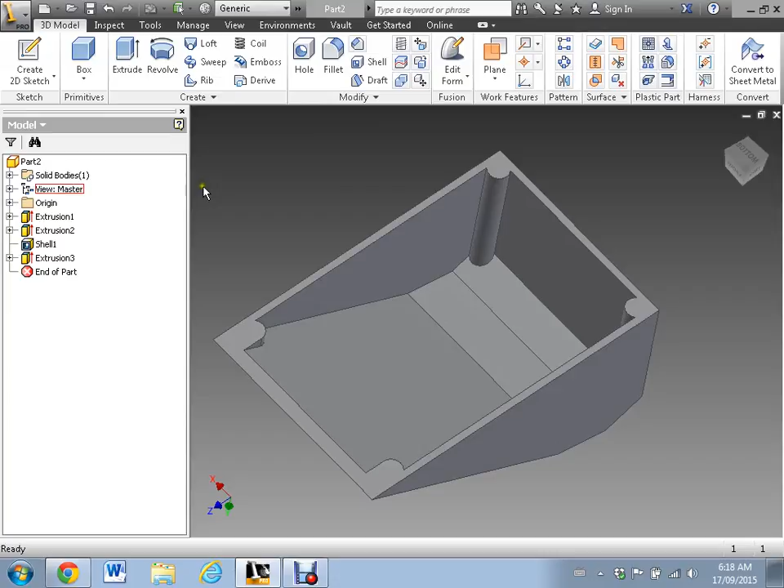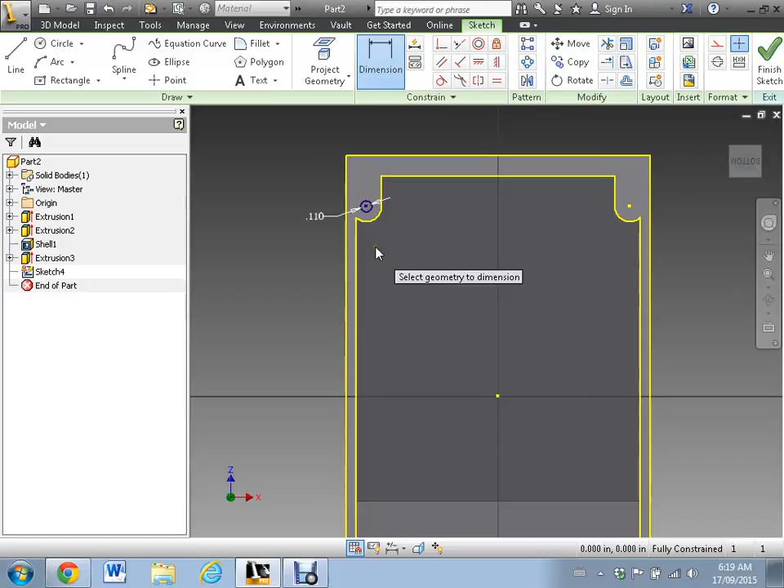I'm going to continue here. I'll click on the surface and create a 2D sketch to make some holes for screws. I'll click on one spot and dimension it the first time to get this right. This is going to be 0.11, for the size of screw you guys will be using. Once that's done, it's pretty straightforward.

Let's go and mirror it. I'm going to take a line, and right mouse click and hit cancel. Now I'll go to pattern, select my geometry, select my mirror line right there. Whoops, I'm going to select the other geometry. Hang on, let me think about this. Oh, can we do that? No, we can't, so I'm going to cancel out of this.

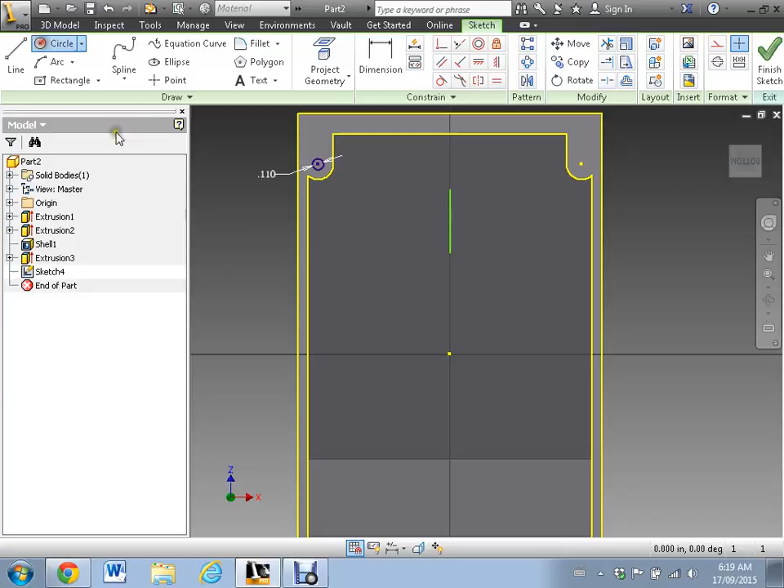Before I do that, I'm going to put the other circle down here. Just thinking about how I'm doing this. You can see it automatically lines up if I do it right, so I don't have to do any dimensioning. Now I'll do my pattern, selecting that as one geometry and this down here as the other, plus my mirror line. Then I hit apply, and they're both done.

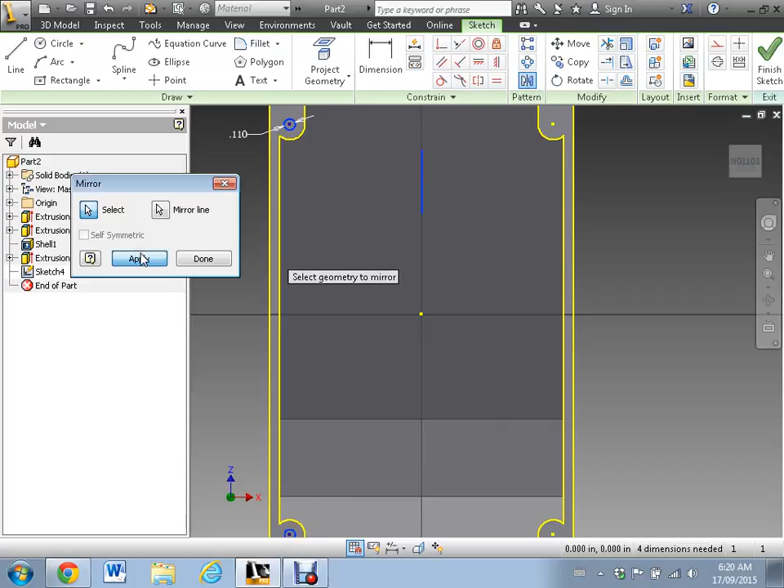That's the easier step. So there are my screw holes. Now I'm going to click finish sketch.

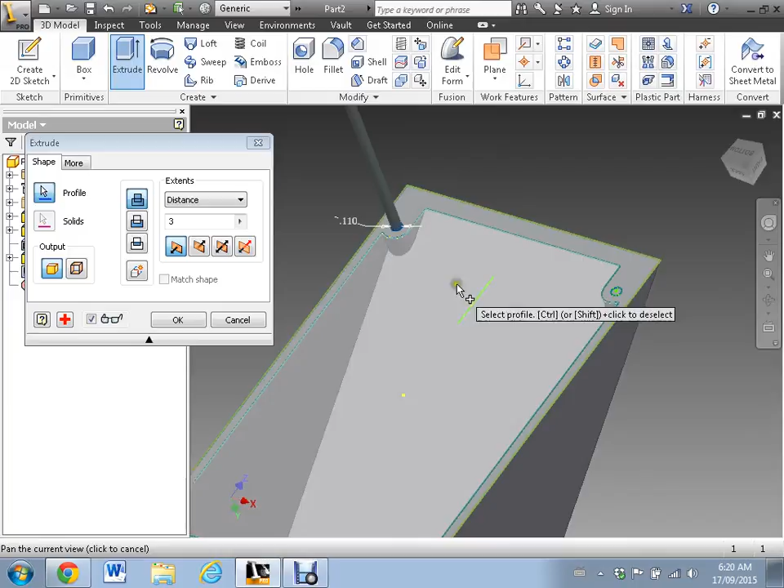Now I'll extrude as usual, zooming in here so I get the right ones. I might have to zoom in and out a bit to get these. Come on, there we go. Zoom in to get that one, zoom out a bit, zoom in, there we go, and the last one.

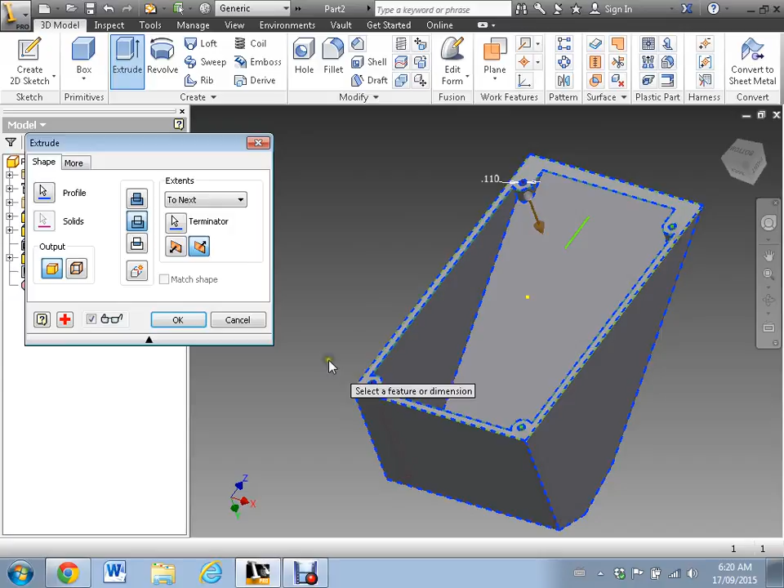This time I don't want these to go all the way through because there will be a hole on top. If I go to next, you can see it automatically cuts, but the bottom ones in the front come all the way through, so I'm not going to do next.

I'm going to go to distance instead. The screws are quite short, so I'll put it at 0.3 of an inch. When I do that and hit enter, you can see... oh no, they're still going through, so I'll have to adjust that.

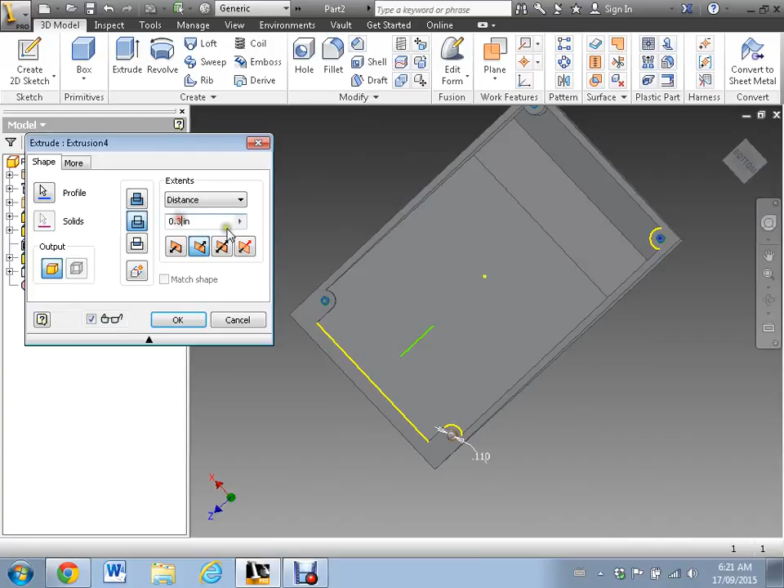Let's go back into this extrusion. Maybe they're 0.275. Let's see what happens there. Now when I flip it around, okay, they're barely hidden.

On my design, because of the way I did it, I might actually have to change it. Let's go back and put this at 0.375 because I like that. Hit OK. Well, I guess I've got to change my body.

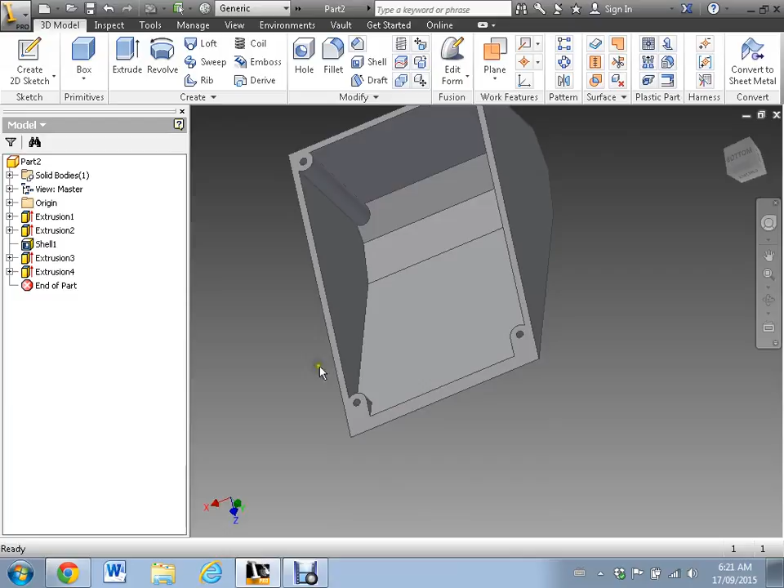I'm going to go back up to this extrude here, back to the sketch, and double click it. I'm just going to put some dimensions in here now.

Let's dimension that one. Actually, no, hit cancel, let's just delete this dimension. Hit escape, click on that one, hit delete.

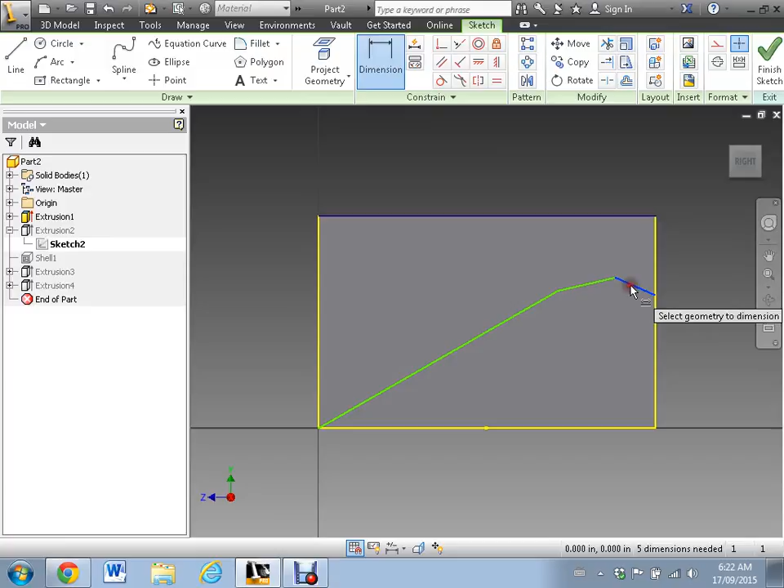So for the dimension, if I click once and click again, then I can click there. X out, let's try that one more time. I should be able to get that angle dimension. I click once, there, come back, and click again. There we go, that's the angle I want. I'll just hit OK for now.

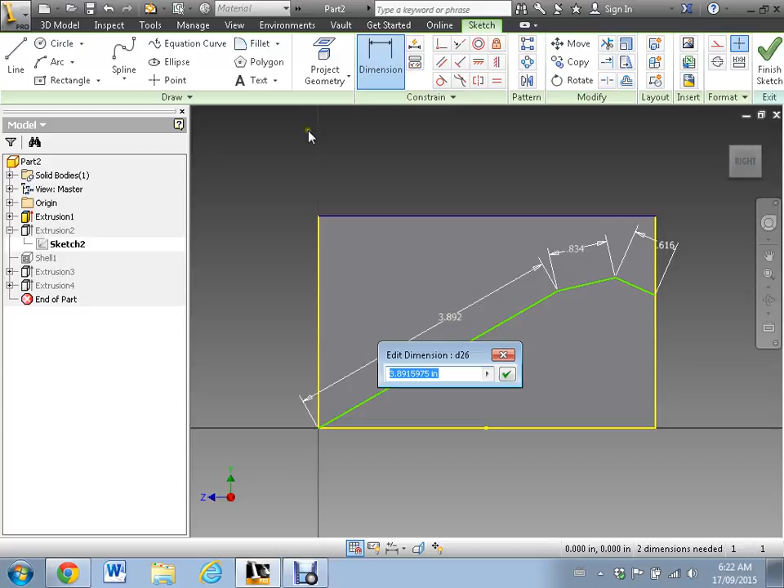And this one I click once, I go off of it, come back, click again. There's that dimension, okay. This dimension, no, click again, there's that one. So what I'm going to do, and the other dimension I'm going to do, I think, so that's okay, is I'm going to go from right here to here. There we go, that's the one I want. I'm going to click OK.

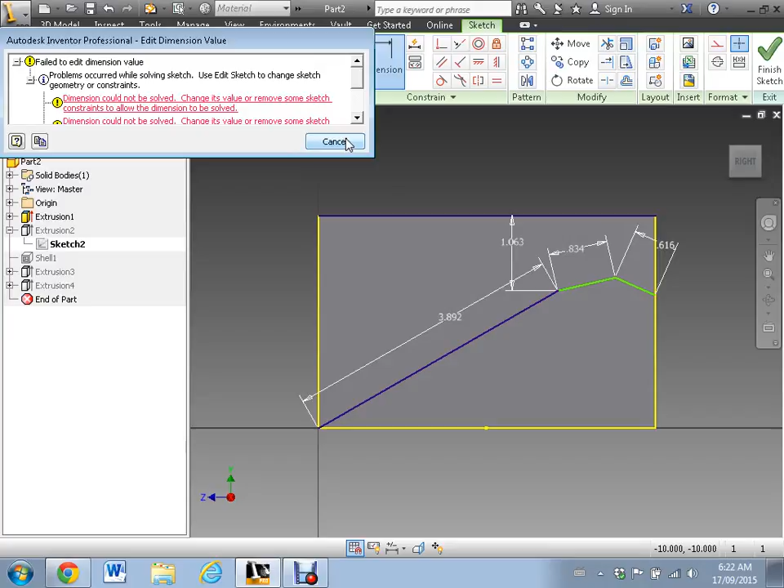Now I might get an error here, so let's find out. I'm going to change this and lift it up a bit, so I'm going to say this is going to be 0.75. Okay, what happens? Yeah, it's going to give you some errors because I put some dimensions in here, right? So I have to delete some dimensions first. Let's just delete this one because that angle, that distance is going to change. And let's delete this one, okay, because that's going to change.

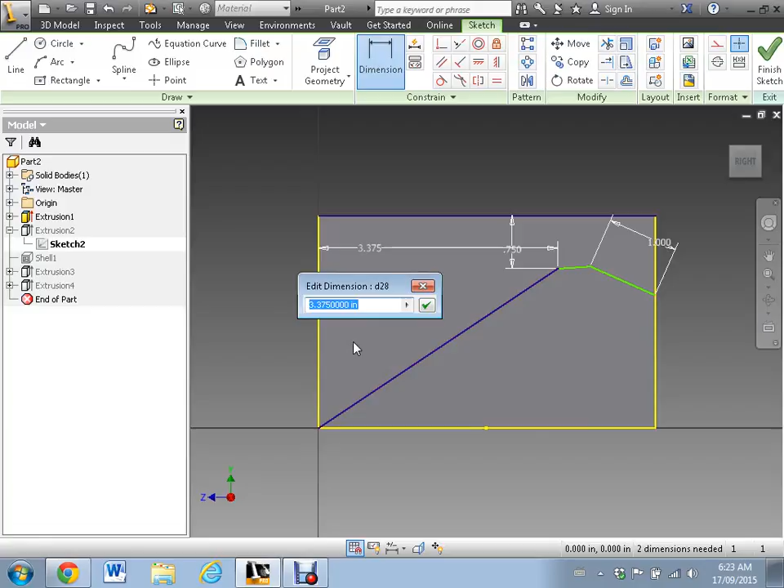Now when I change this to 0.75, there we go, it's more of an angle. And this one here, I'm going to take, and I'm going to say that one's 1. What happens when I do that? It just does that. And I think the last one I'm going to change, if I go from here to here. I'm going to change that to 3.375. There we go, a little steeper now.

Okay, hit finish. You'll see that this will all change. You can see the holes are still there. Now what I'll do one more time. Oops, let's go back up to this sketch here. And let's just change this number to 2.75.

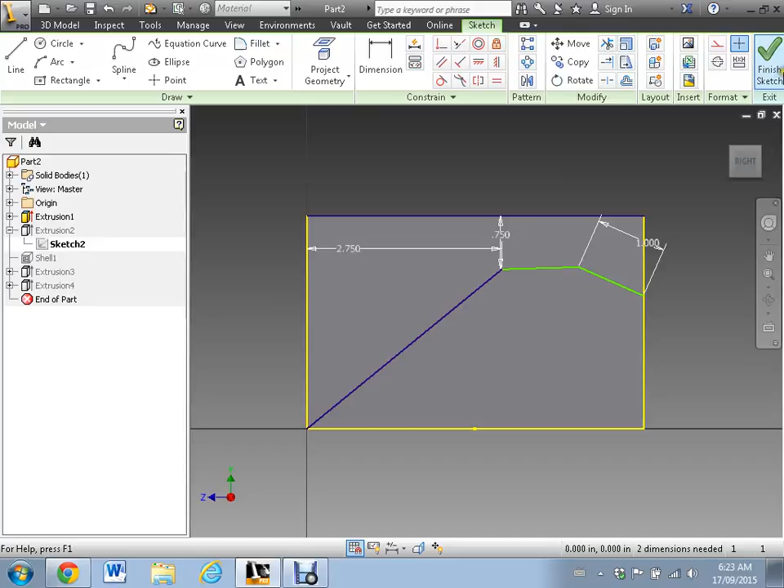Okay, you can change this, and I'll explain this, is you can actually go and add stuff here. I mean, you don't have to do the shape that I'm doing. The whole point of these tutorials is actually to show you that you can modify stuff, right? So yours doesn't have to look like this at all. So if you wanted to, you can simply just say, oh, you want to know something?

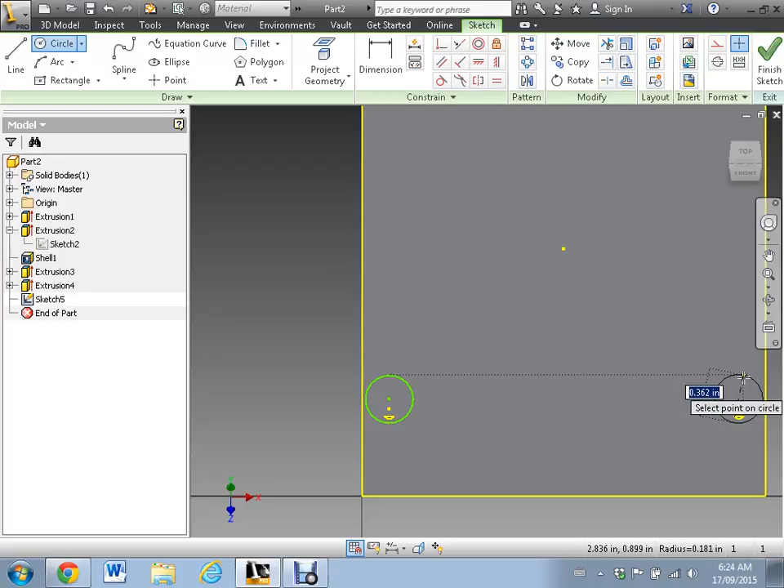I'm just going to take this and I'm going to create a sketch, and I want to create something around here, right? So I'm just going to put, let's see, not on that hole, but I'm just going to go right here. Let's go create a circle, right? And I can say, well, really, I'm just going to hide those anyways. So if I do that, and then over here, I'm just going to line that up. There's my lining up, and watch, it'll automatically line up as soon as I'm done. There we go. I could say, well, geez, that's what I want there, finish sketch.

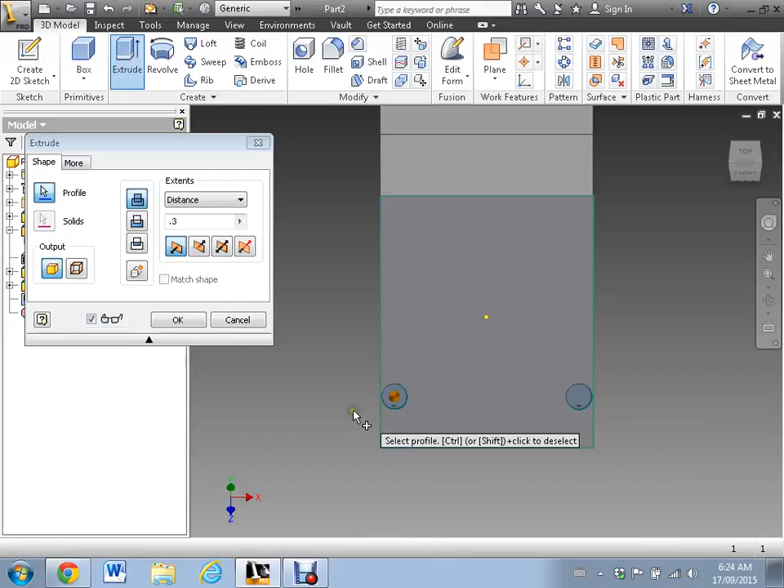And I can then just go and extrude the boxes, right? I can just go extrude this. Let me get out of that in a second. So let's go back to extrude, and I could say I want to extrude this here, and I want to make something on there, right? So I could say I want those little nubs there, and you can screw something into there later. So it's up to you.

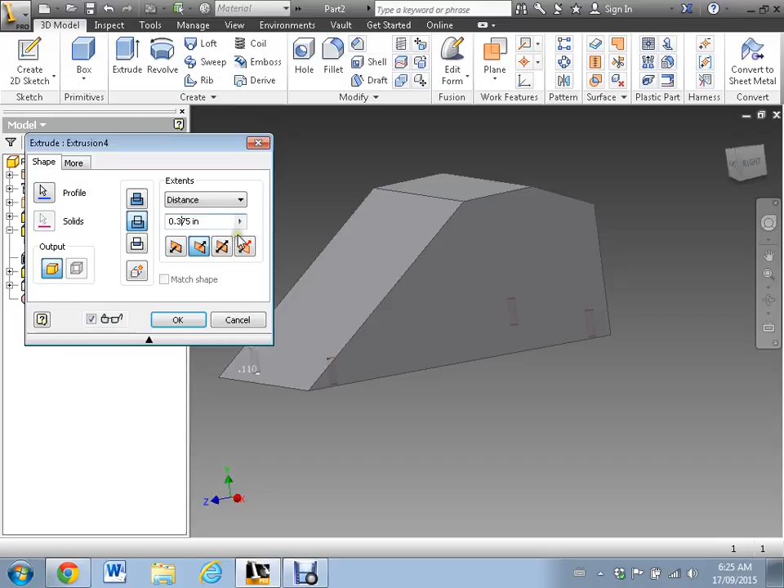But for right now, for this purpose, I'm just going to change, because I still have those holes, I'm going to delete this sketch. Okay, I'm going to go back to these little holes, and I'm just going to put that down to 0.3. And those will be hidden now. There we go, now they're hidden. So that kind of completes almost my body.

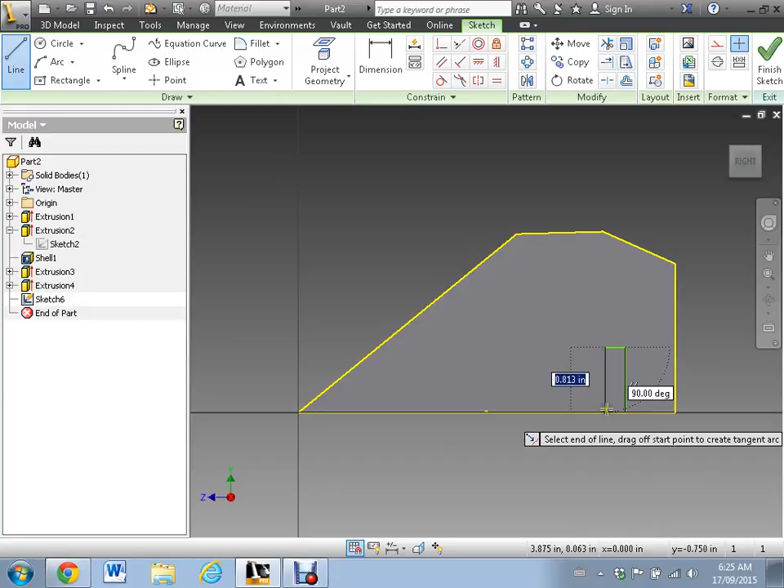The last part that I need to do is for the axle holes to go through. So I'm going to take that surface, and I'm going to go back to Create 2D Sketch, and I'm simply going to create a set of lines. And what's going to happen is when I do this, and this is just my quick view, and again, you know that I'm selecting and closing off a box here, and I'll hit Escape. Shoot, that's not what I wanted to do. Go back to here. I'm going to hit Escape. I hit by accident F1. Okay, so cancel it. There we go.

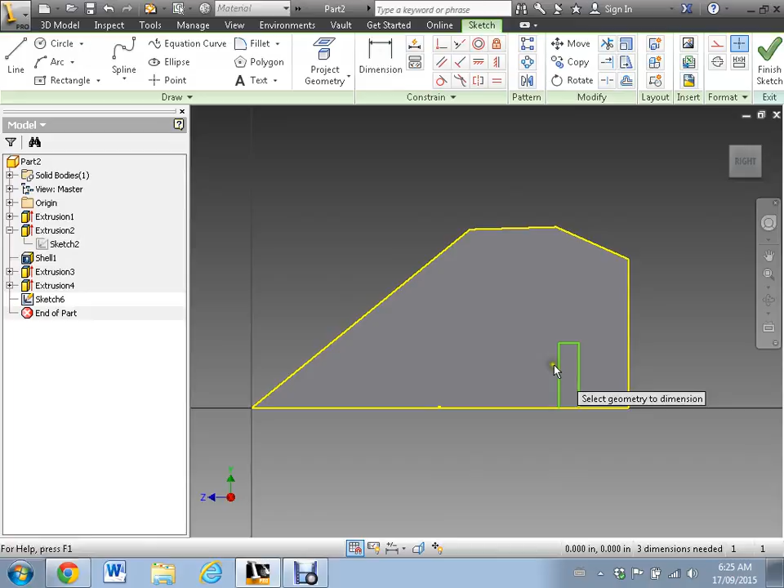Okay, so I'm going to put some dimensions on here, because from the back, this is going to be important from here to here, because I'm going to probably have to adjust this in the next tutorial.

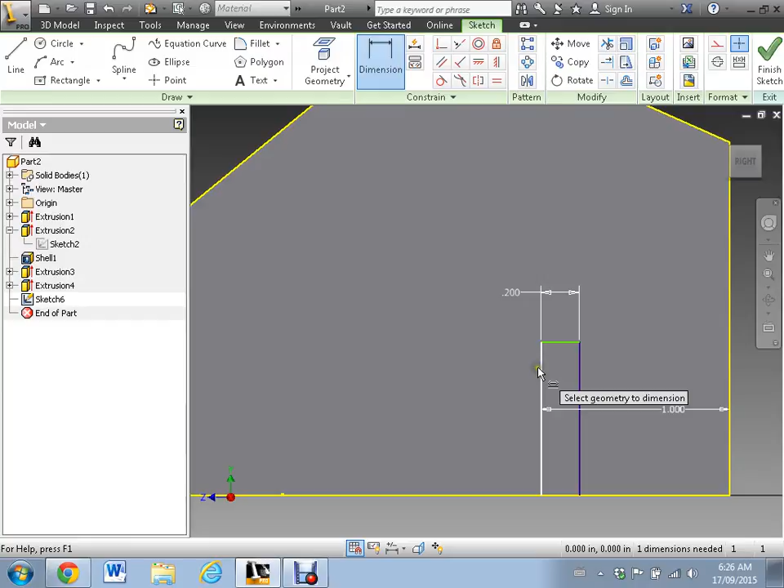Okay, I'm going to change that to 1 for right now. I'm going to take this line and dimension it, maybe set that one to 0.2, and I want the height, so from here to here, maybe that's going to be 1 for now. Now I put the 1 inch from there to there. I think I'm going to escape, or click on this.

I'm going to right mouse click. I don't think it shows up on your video, and I go, no, I can't do that there. So I'm going to take that dimension and hit delete, and just put a new dimension in, going from this line to that line. I'll leave that as 1.

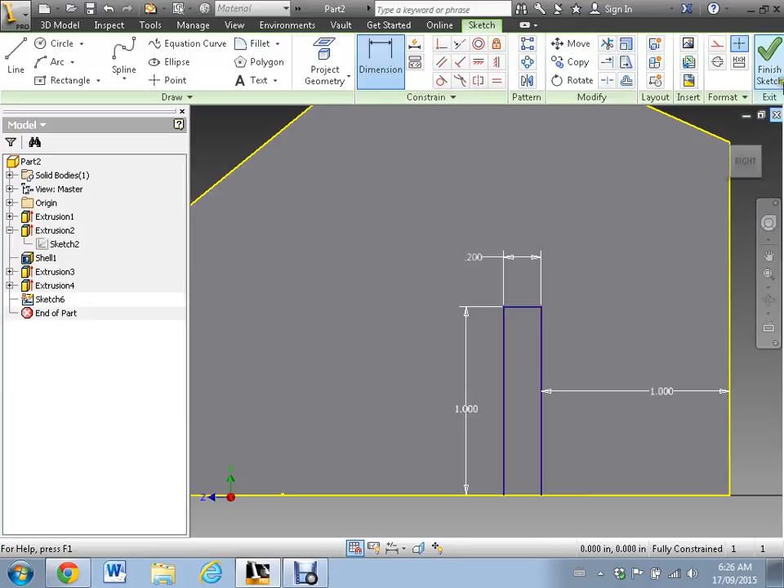There we go. I'm going to hit Finish Sketch, and then the last thing I'm doing here is extruding that part, and it says distance. I'm cutting, and it's not distance, it's going to go all, and I'm going to select this bit right here.

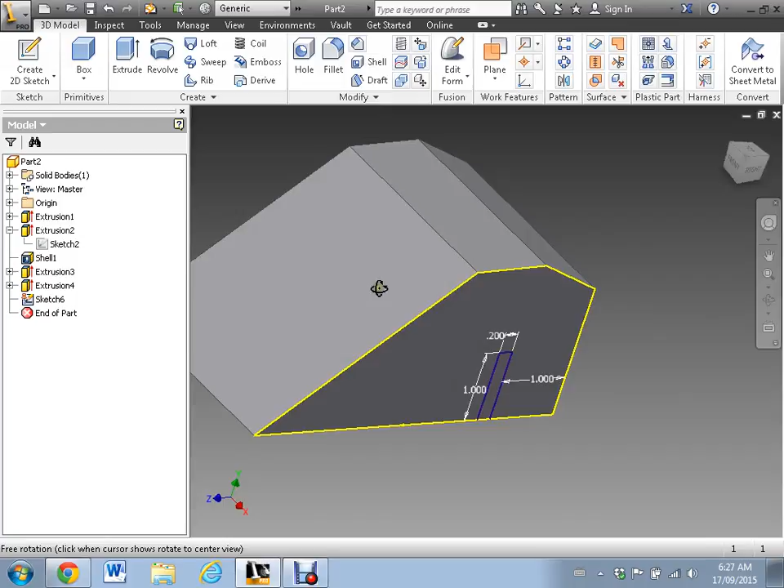Oh, why didn't it pick it? Let's just hit cancel for a second here, so let's do this so I can see it. Let's go extrude, because I forgot to pick what I want. There we go. I'm going to go to all and cut, and what that does is when I go underneath, you can see it's gone all the way to the other side, it's cut out there. I'm just going to hit OK, and there's my last part.

So that's the basis of my sumo.

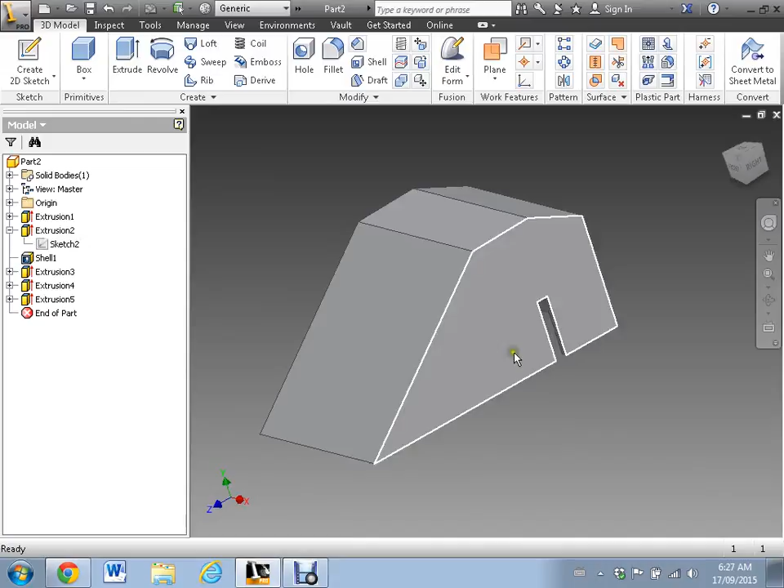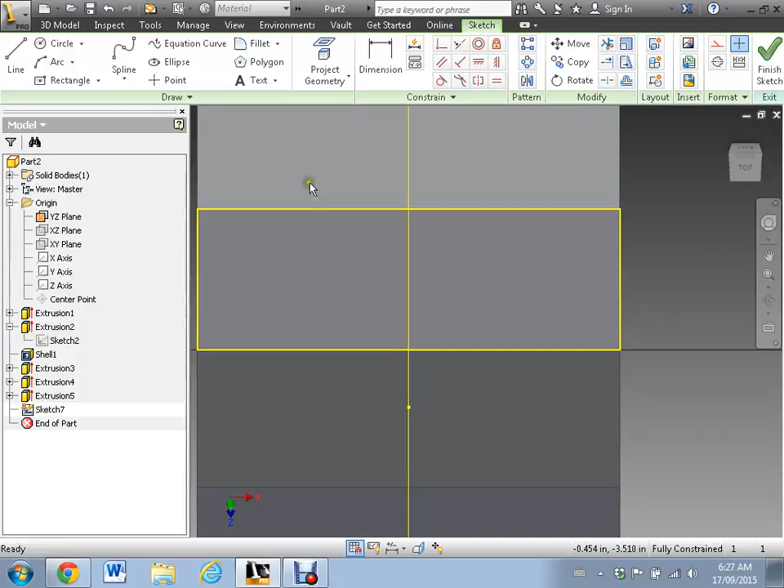Then again, I'm lying, because we should probably put a hole for the cable to go through. So I'm going to take a surface there, and before I do that, I'm going to go to Origin, go to the YZ plane, and turn it on. What we'll do here is create a 2D sketch on the surface. I'm going to zoom in and put a hole, kind of in the middle here.

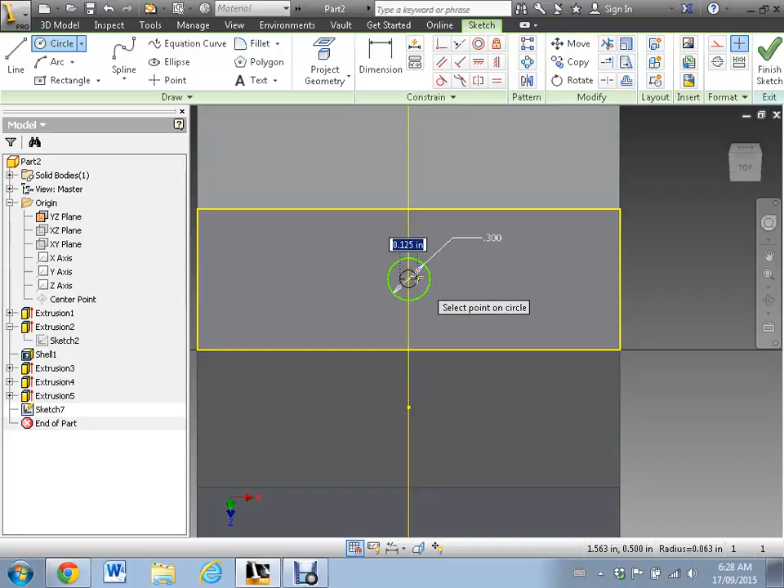So I'm just going to go, let's go 0.3, sure. Let's measure it and go 0.3. And then I'm going to take the circle, another one, and go for, let's go about 0.125, eighth of an inch. Yeah, that should be about the size of the mouse cable. Do that, finish the sketch.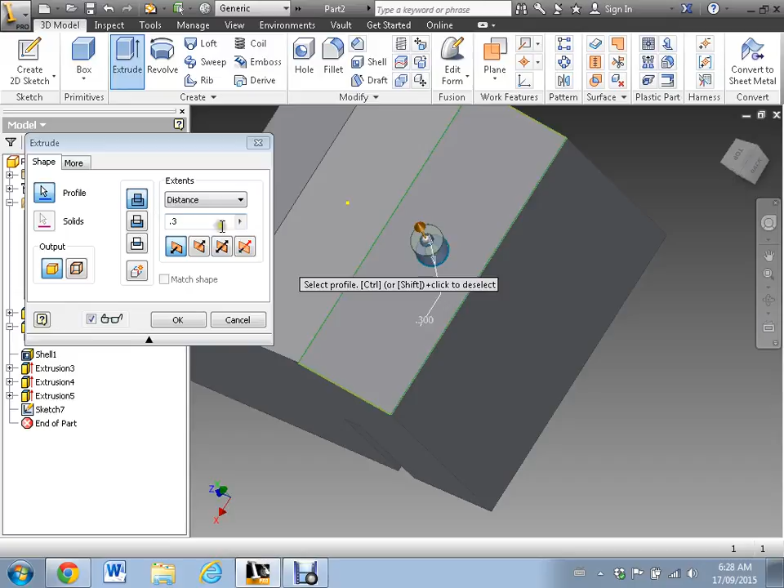This time around, I can turn this origin off now, so I'll turn that off. I'm going to extrude this part, up, sure, 0.3 of an inch high. It doesn't have to be very high, 0.3. And you can see that I did mess up because it doesn't go through out the bottom, right?

So I think what I'm going to do, let's try something. In a video tutorial, we're going to go extrude. Oops, we're going to grab this. Can I actually do that? Go extrude. No, it's going to give me an error.

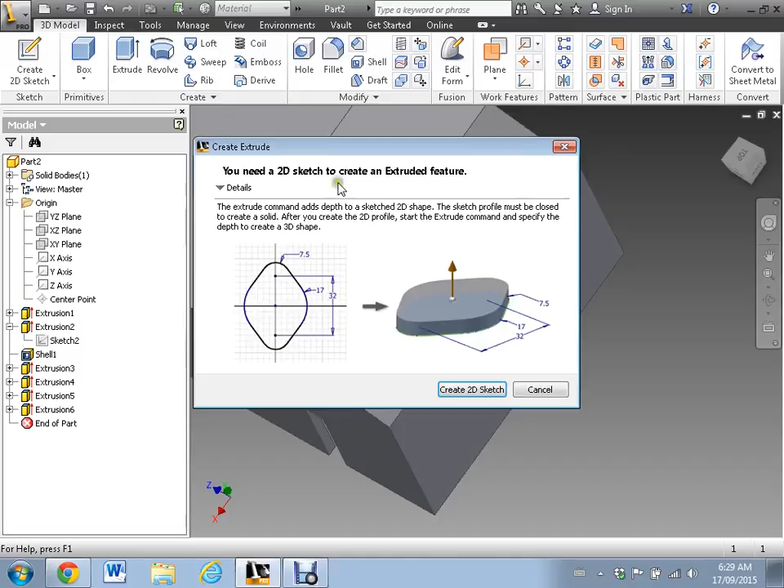Okay, so I kind of goofed here, so what we'll do is just do a 2D sketch, and we'll do this. I'm going to draw a circle, and whoops, that's not on the center. Try that one more time. Draw the circle. There we go. And we'll snap to that.

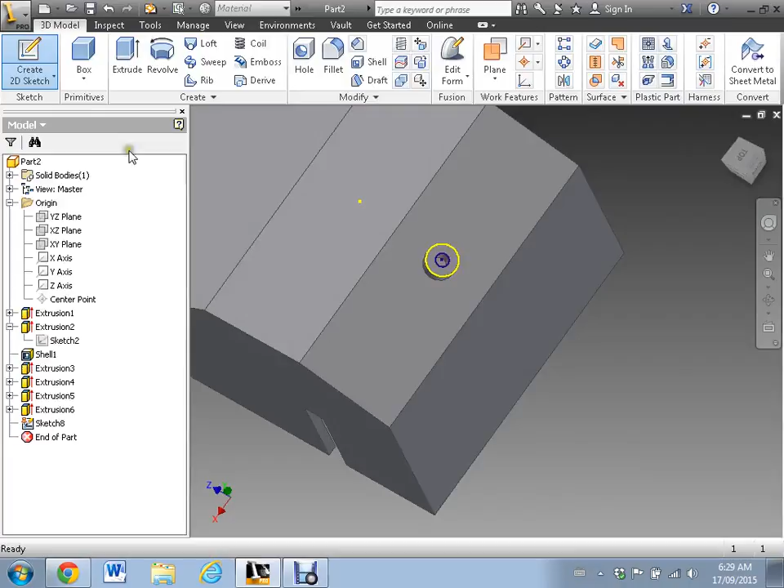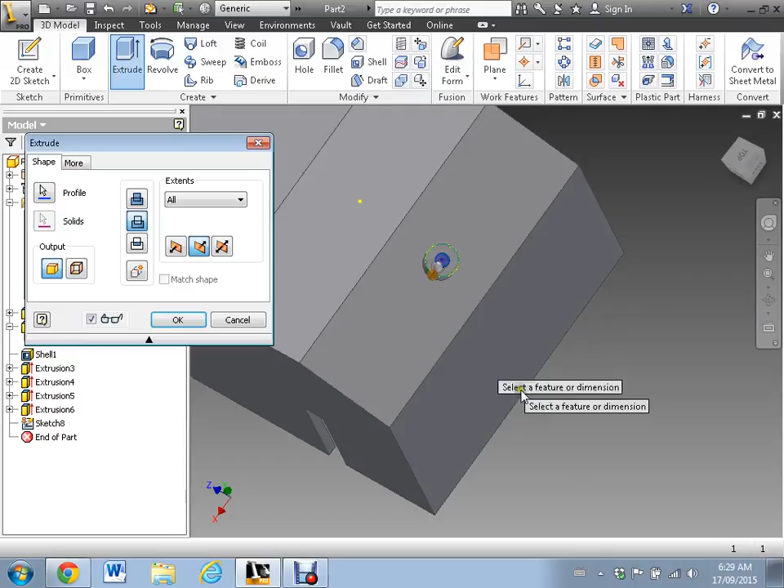Hit finish. Then we're going to go extrude, cut, reverse direction, and go all. Hang on a second, I forgot to pick it. Let's try that one some more. Extrude, this little bit here, that makes it work. Cut, changes to all, and if we go to the underneath, you can see that it's actually got the holes there, right? So then we just hit finish, or OK, and now you can see that the hole's all the way through.

Okay, now we're done, we got all our parts done. We got a cable to go through there, we got screw holes on the bottom, and we got spots for the axle. And this completes tutorial number 9.